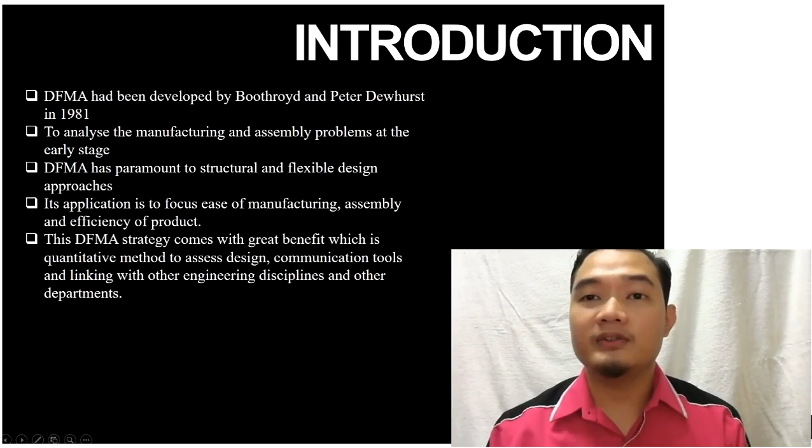This DFMA strategy comes with great benefit, which is a quantitative method to assess design, communication tools, and linking with other engineering disciplines and other departments, and modularized with step-by-step for developing products. Then the DFMA analysis is performed and computes all the essential requirements, and the most optimal design can be achieved throughout the analysis. So next is literature review and methodology.

DFA has been taken seriously since the early 1960s. The development of this method is to work and overcome benefit to the company using this method. DFA method should be carefully considered in the early stage so that it can estimate the cost and time in a proper manner. The main purpose of DFA is to ease the assembly of products, and for the DFA tools to help ease the designers toward the assembly issues.

The original and the redesigned products are compared to show that the new design will contain lesser parts, hence reducing cost, assembly time, and operation. Furthermore, a product that has fewer parts will have increased quality because mistakes can be avoided. In addition, DFA methods are essential tools in providing feedback to the designers about the design efficiency from the assembly viewpoint.

Furthermore, the goals of DFA may be stated as design for minimum parts, easy to handle, easy to insert and fix, and reducing or minimizing operations that do not add value, like adjustment or reorientation.

To achieve the stated goals, the DFA guidelines should be followed, which is lessen part counts and types, modularize the design, eliminate adjustment, design parts for easy feeding or handling operations, produce parts that can be self-aligning, assure capable access, design parts that cannot be installed falsely, use competent fastening or fixing strategy, reduce handling or reorientation, utilize gravity, maximize part symmetry, and assure detailed design for easier assembly process.

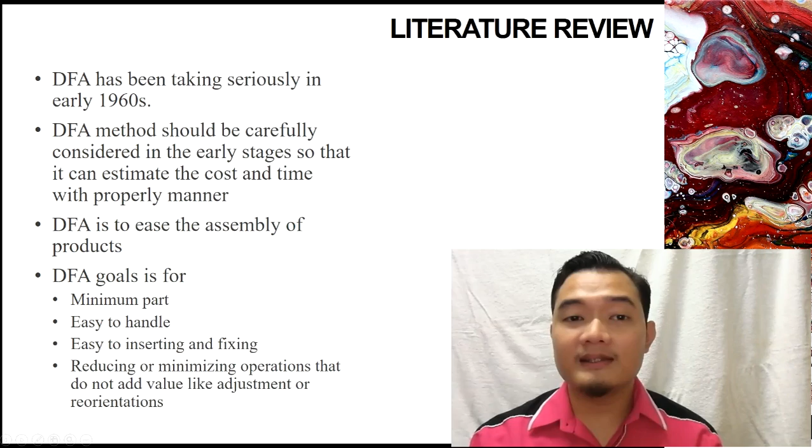Meanwhile, design for manufacture, DFM, is to ensure minimal cost for production. The selection of appropriate processes for the manufacture of a particular part is based upon the matching of the required attributes of the parts and the various process capabilities.

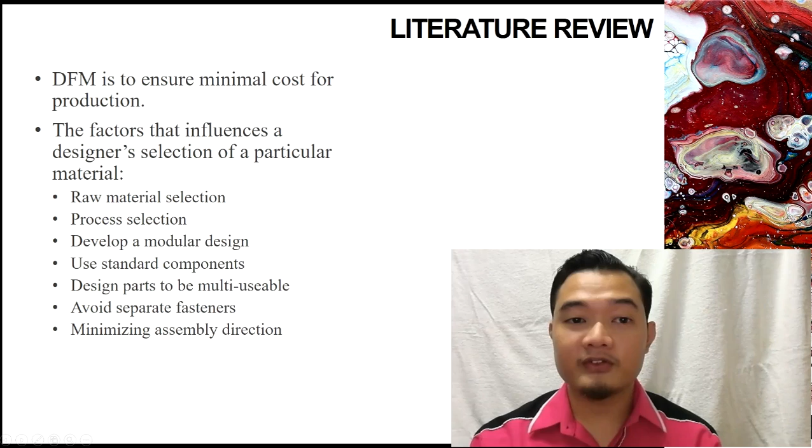The process factors which influence a designer's selection of a particular material are raw material selection, process selection, develop a modular design, use standard components, design parts to be multi-usable, avoid separate fasteners, and minimizing assembly direction.

So next is methodology. The figure shown is my methodology project flowchart. First, identify the product to improve, then disassemble the product and study part details. After that, evaluate the design efficiency of the original design using the DFA table or DFA worksheet.

Then, after the result is obtained, is the result verified? If no, then we go back to evaluate the design efficiency of the original design using the DFA table. If yes, then we interpret the result from the DFA table of the original design.

Then propose product design modification, then evaluate the design efficiency of the improved design using the DFA table. Then compare the result between the original and improved design. If the design is not improved, we go back to propose product design modification. If the design is improved, construct a visual representation of the proposed modification.

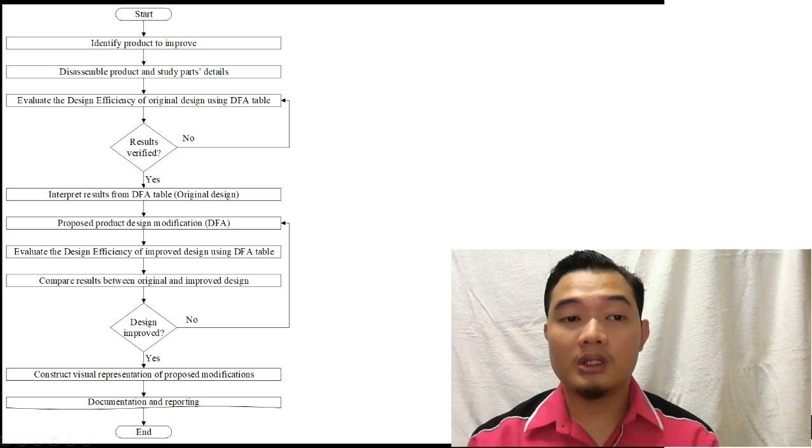Then finally, documentation and reporting can be done.

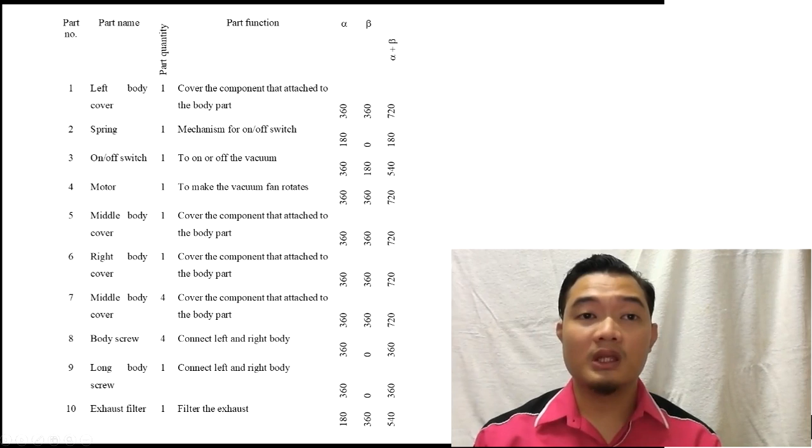So next is the DFA worksheet checklist. As shown in the figure, we have the part number, part name, part quantity, part function, alpha, beta, and alpha plus beta. The table consists of 37 parts. So the Mr. DIY handheld vacuum cleaner has 37 parts.

Next is results and discussion. The first table is from the DFA worksheet of the original product. The design efficiency is the matrix design expressed as a cost function that helps reduce the overall number of components by focusing on the need of each part, and it defines the design, handling, and assembly time that affect the cost of product assembly, as shown in the table.

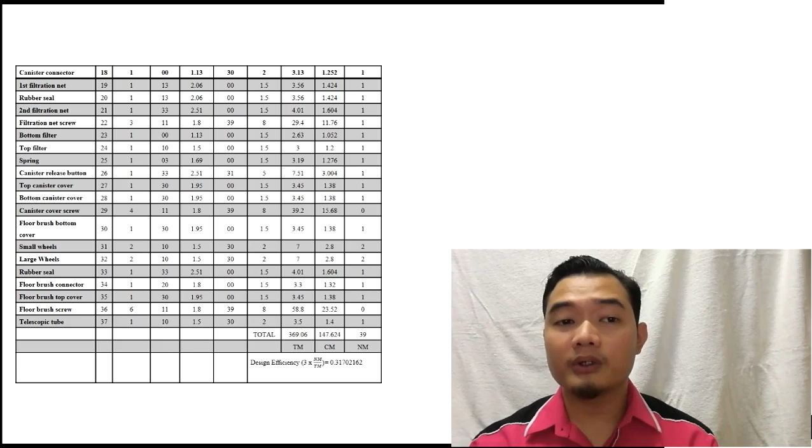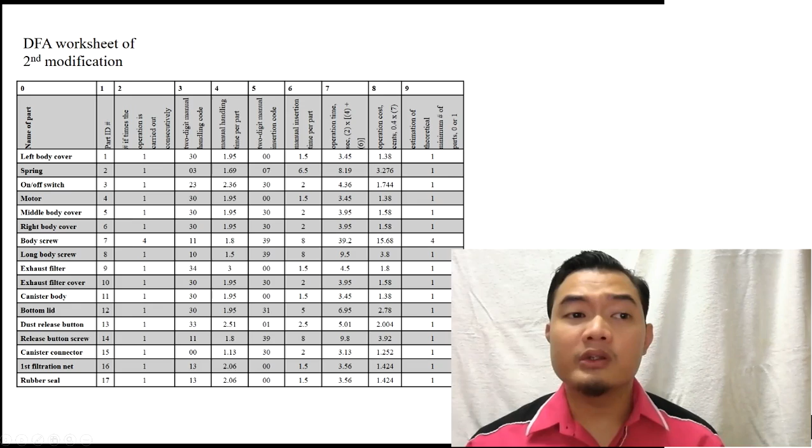The table shows that the design efficiency of the original product is 0.31702162. Then for the final modification, the design efficiency achieved is 0.5016969. This is a huge comparison to the original product, due to the DFMA method applied to the modified product.

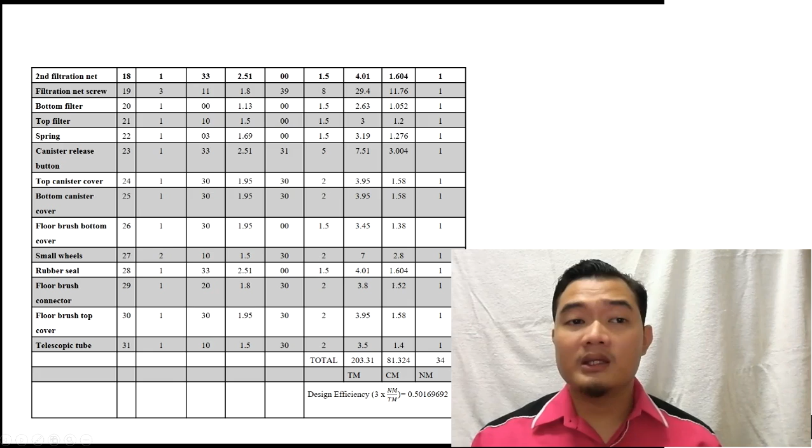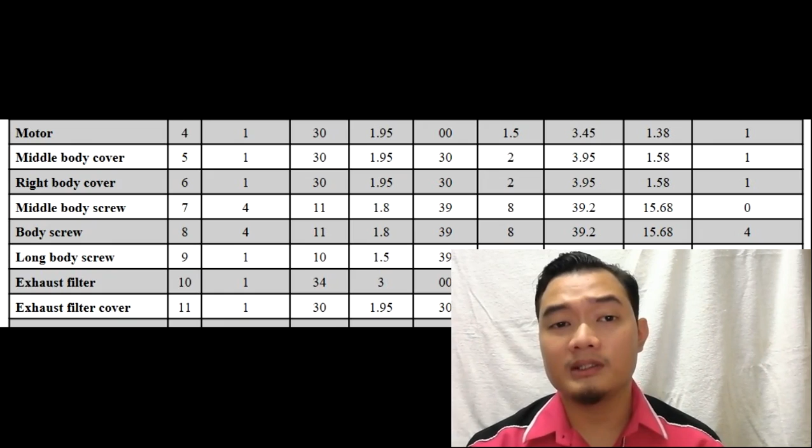So the final design efficiency value achieved, as shown in the table, is due to elimination of the middle body screws, canister cover screw, floor brush screws, inlet screw, and inlet at the canister body. Subsequently, the middle body cover is proposed to be set as a part that is secured immediately using a snap fit function. Even though the insertion type has changed, the manual insertion code does not change. But as the screws were removed, it gave a great impact to the total operation time and cost.

So next, the DFA worksheet comparison between the original product, first modification, and second modification. The table shows the comparison of number of parts, operation time, operation cost, and design efficiency between the original product, first modification, and second modification.

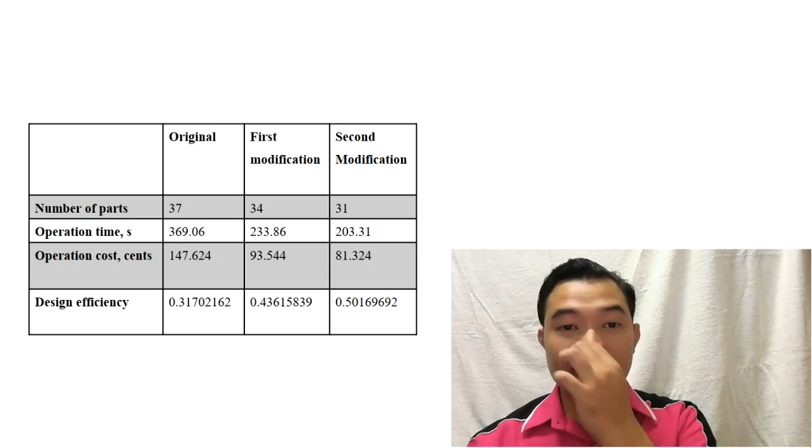The original product comprises 37 parts, reduced to 34 in the first modification and to 31 in the second modification. This shows a total reduction of 6 parts. Thus, the reduction of parts is equal to 16.21% from the original product to the second modification.

This is due to the elimination of some parts from the original design. This elimination also affected the operation cost, which is reduced from 147.624 cents to 81.324 cents.

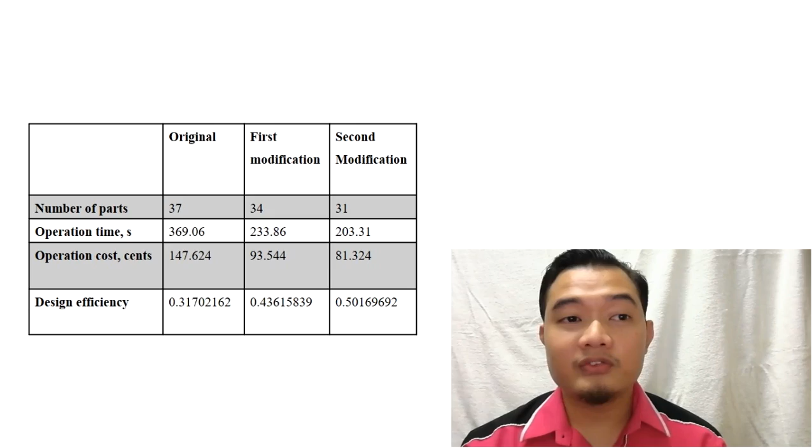Finally, the design efficiency value achieved increased from 0.31702162 in the original product to 0.43615839 in the first modification. Then the final modification achieved a design efficiency of 0.50169692, an increment of 0.1846753 from the original product.

As for conclusion, this research is principally about evaluating and analyzing the existing product and enhancing the design of a handheld vacuum cleaner using the DFMA method. Throughout the research, the DFA worksheet proved beneficial to improve product design. The final result confirmed that DFMA is able to reduce product complexity by lowering the number of parts, subsequently providing better operation time, operation cost, and design efficiency value.

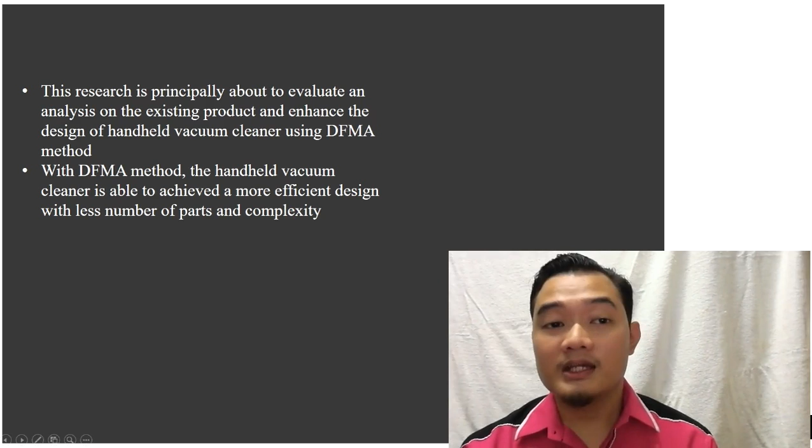Nevertheless, by using the DFMA method, the handheld vacuum cleaner is redesigned and achieves a more efficient design with fewer parts and less complexity. So that's all from my presentation. Thank you.